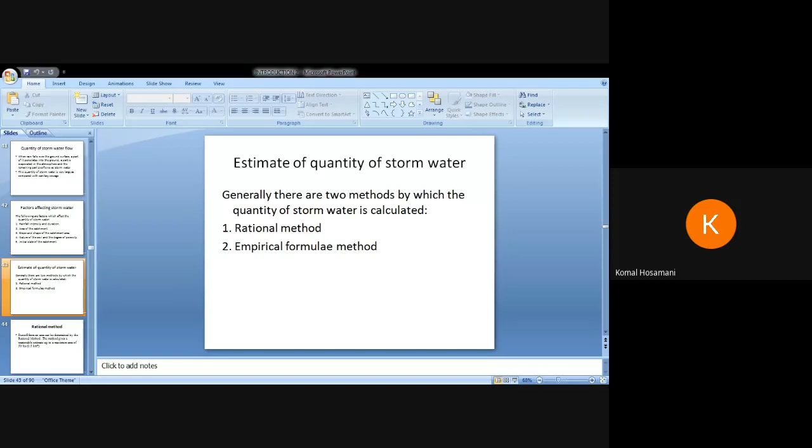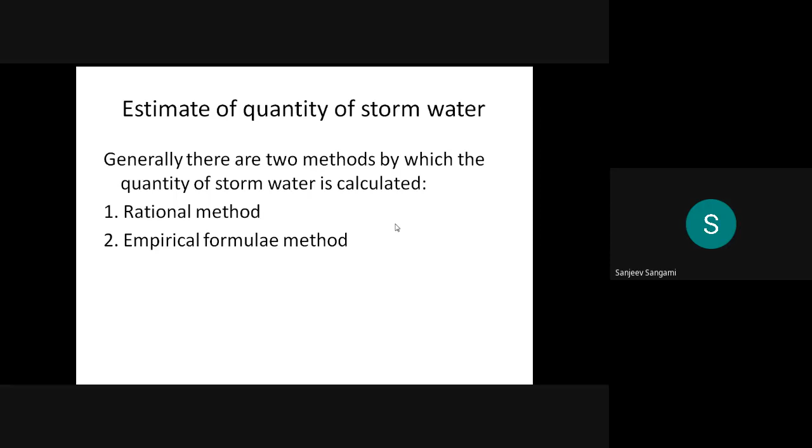Yesterday's class we were discussing the estimation of quantity of storm water. There are two methods: one is the rational method, and one more is the empirical method of determination of storm water. Normally the rational method is used when the area is less than 50 hectares, maximum 50 hectares. If it is crossing 50 hectares, then we will use the empirical method.

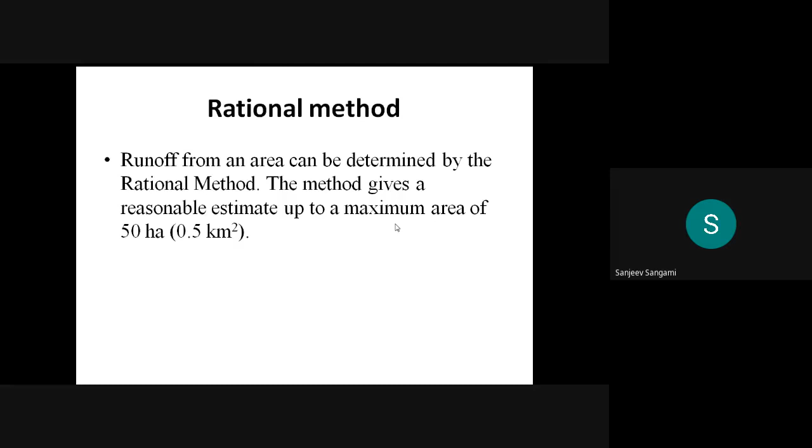These are some of the assumptions we have already discussed. Very importantly, precipitation should be uniform throughout the basin of study, and the frequency should also be same, and it is assumed that the rainfall intensity also should be same. Normally it is restricted to 10 minutes of rainfall concentration that we already discussed.

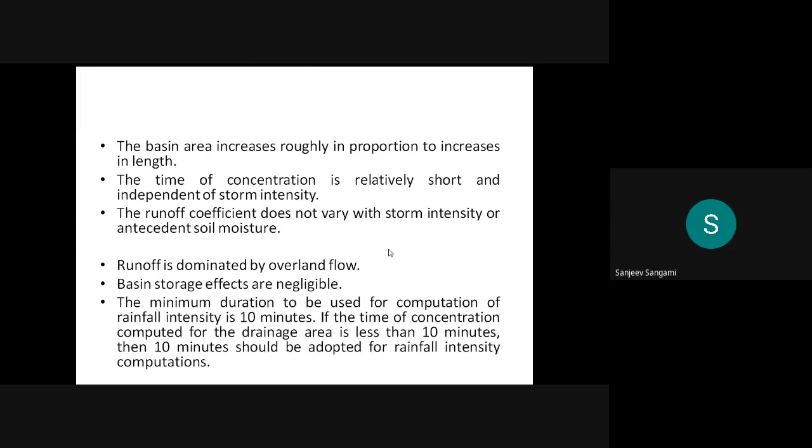It is given by the formula Q equals CIA divided by 360, where C is coefficient of runoff, I is intensity of rainfall, A is area in hectares. Whatever rational methods and empirical formulas we discuss today have to be substituted in their proper units only. For example, Q should be substituted in meter cube per second, I in mm per hour, C has no units, and A should be substituted in hectares only.

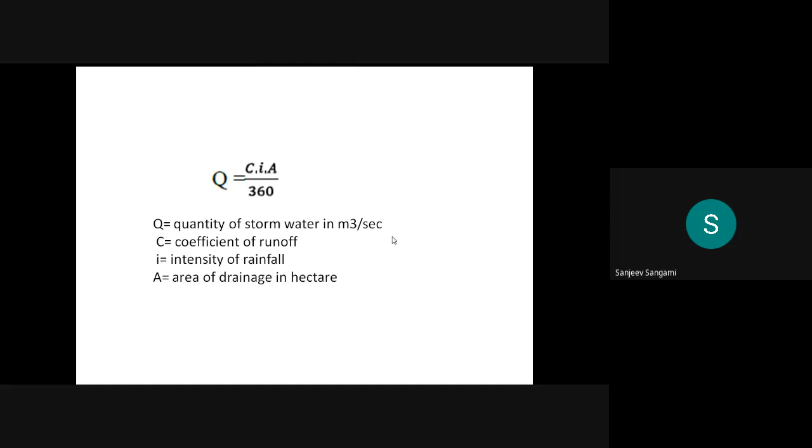If you have different types of basins in one area, then we can calculate the runoff coefficient using this formula: C equals A1C1 plus A2C2 plus A3C3 up to ANCN, divided by A1 plus A2 plus A3 up to AN, where A1, A2, A3 are the areas of different types, and C1, C2, C3 are the different runoff coefficients.

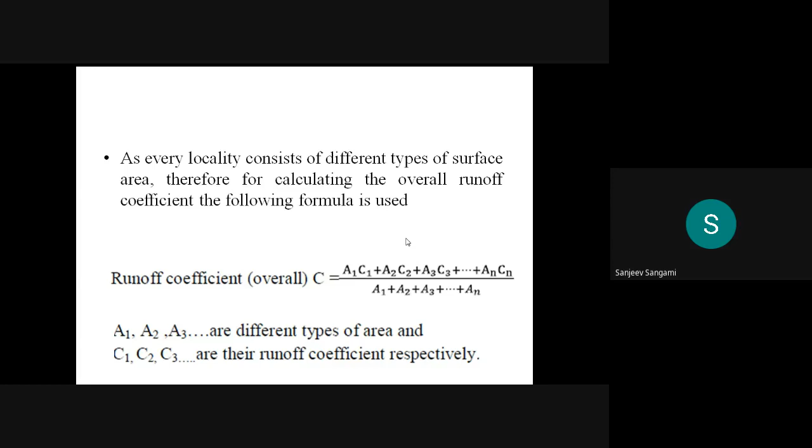These are some of the runoff coefficients for different types of areas. We have drawn three major conclusions: one with respect to the slope, one with respect to the type of area, and one with respect to whether it is residential or related to the city.

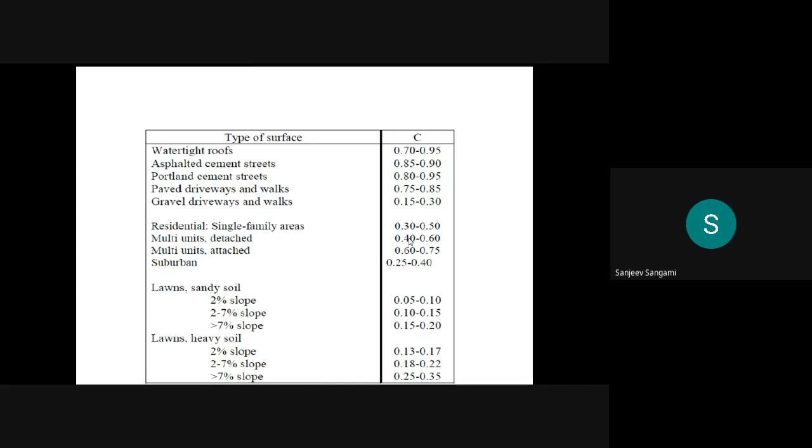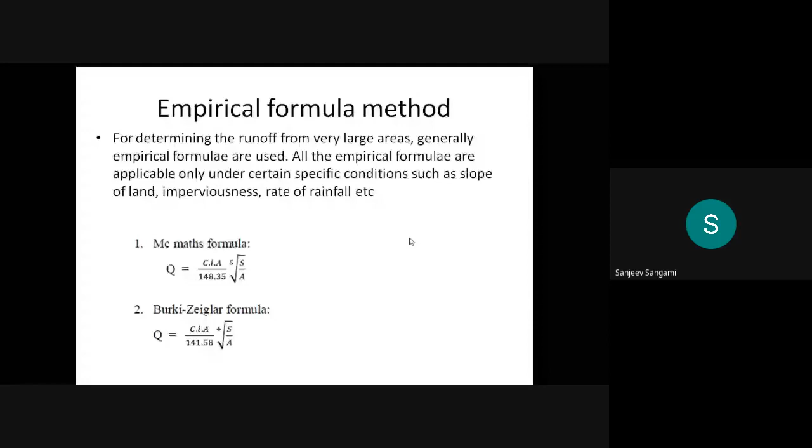We have discussed the empirical formulas: McMath's formula, Burki-Zeiglar formula, Fuller's formula, Talbot's formula, and Fanning's formula. Based on the situations, based on the conditions, we will go ahead with each of these formulas.

Remember that whenever you substitute values in the formulas, it should be in that unit only. In the previous formulas, I should be substituted in centimeter per hour, C is coefficient of runoff, Q should always be substituted in meter cube per second, and A should be substituted in hectares. Wherever M is there in the formula, remember it should be substituted in square kilometers.

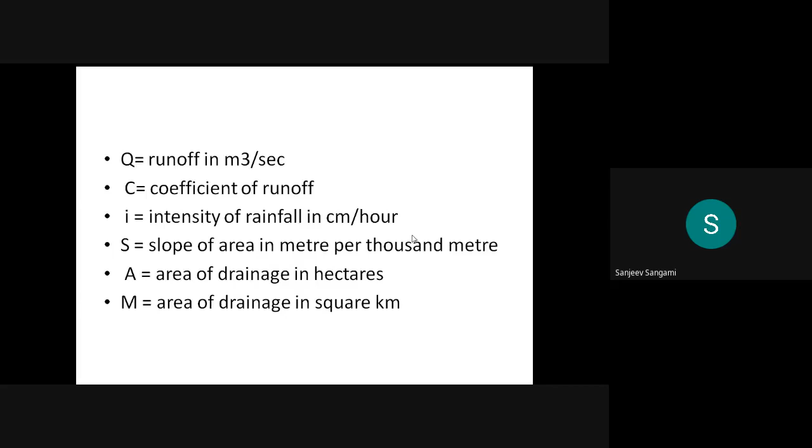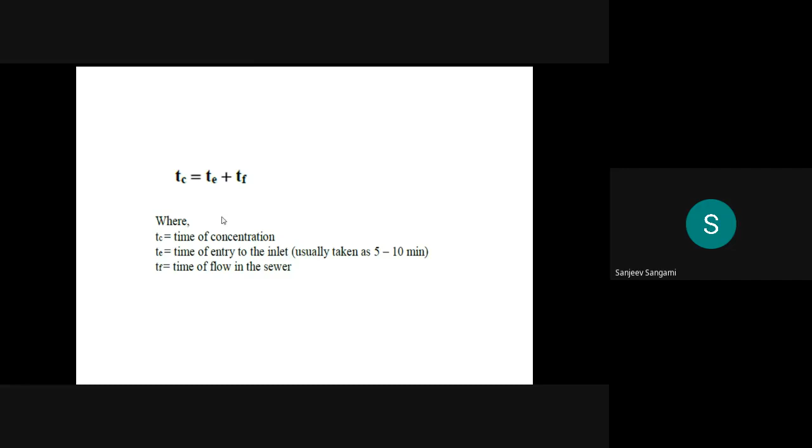Time of concentration we already discussed: Tc equals Te plus Tf, where Te is time of entry and Tf is time of flow. What is time of entry? When the rainfall will start entering the mouth of the sewer, normally we can call it time of entry.

Time of flow means the time from the point of entry of the sewer to the point of measurement of discharge in a pipeline. For example, if I am measuring the discharge at 100 meters, the time taken to reach that distance is called the time of flow.

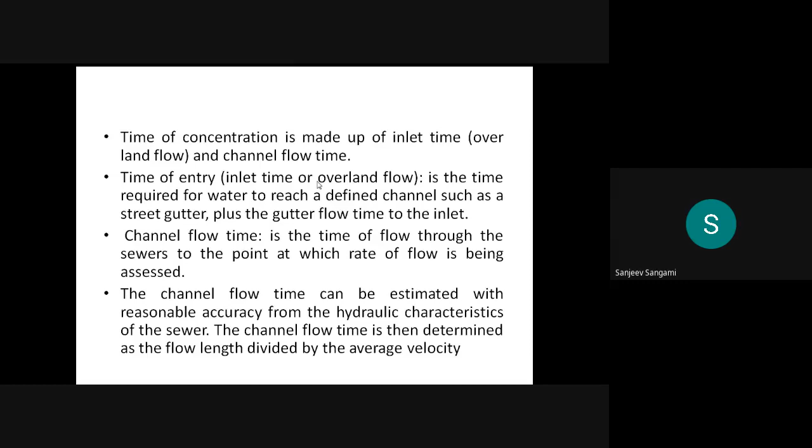Then H is the relief along the main channel. We can assume this relief as the loss of head. Relief is assumed as the loss of head in the channel.

Another scientist, Kerby, gave a method for small watersheds, up to 50 hectares. If the watershed is up to 50 hectares, you can use this Kerby method of calculating time of concentration, where Tc equals 0.67 NL divided by root of S, whole to the power 0.467, where Tc, the time of concentration, is given in minutes.

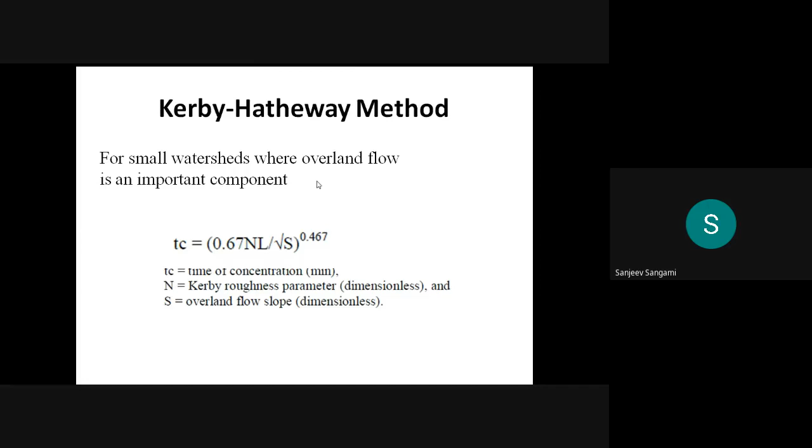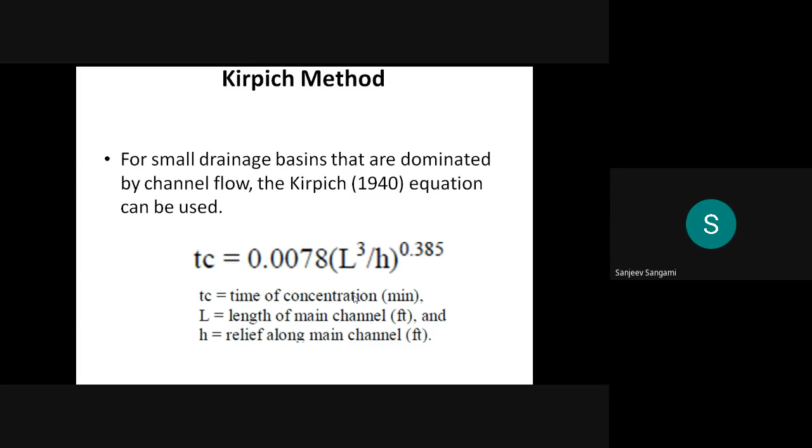So normally these three formulas will be used. The first one what we discussed, this formula is used for up to 200 hectares. If it is lesser than that, we'll use the Kirpich method and the Kerby's method. So then we will try to solve one problem.

This is one problem related to whatever we have discussed, the empirical formulas and the rational methods, to see how much. We already said that the rational method is restricted for up to 50 hectares, but if it is more than that, we have to use the empirical formulas, that is, Q is equal to CIA divided by 360.

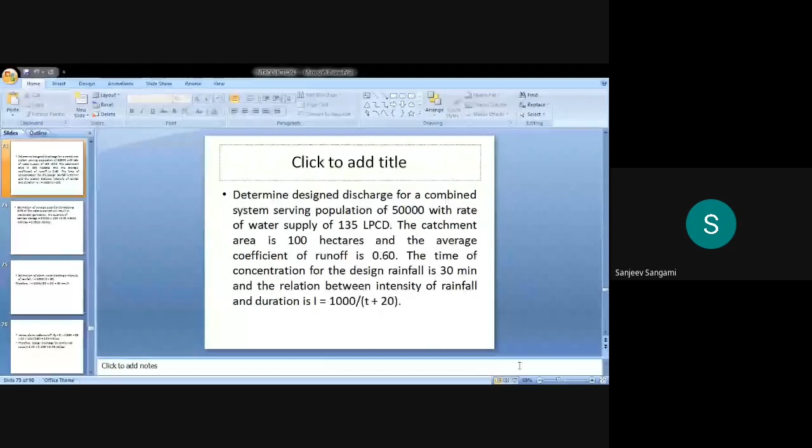Come back to this problem. Determine design discharge for a combined system serving a population of 50,000 with the rate of water supply 135 LPCD.

So the catchment area, that is 100 hectares, they have given. So then we have to use the empirical formula only, because it is more than 50 hectares. Then the runoff C, that is they have given C as 0.6, that is overall, whatever the 100 hectares they have given, that is 0.6 only.

Then whatever the rainfall that is there, they have given, that is I, that is time of concentration, that is nothing but Tc. And the relation between the intensity of rainfall and the time of concentration, they have given the formula called this formula.

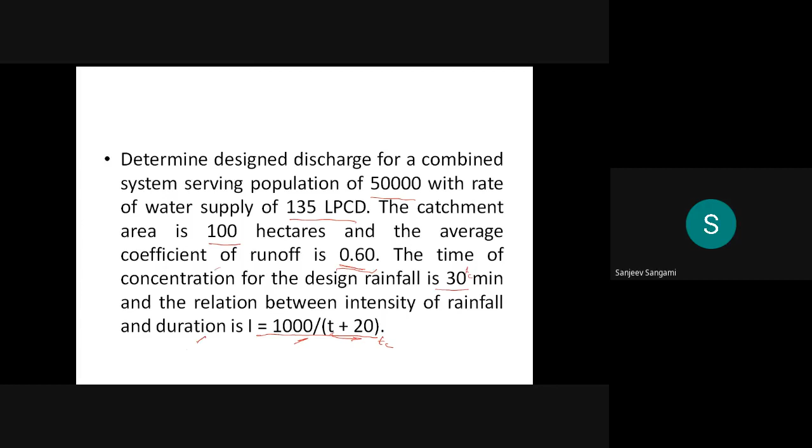So now these are the given data. Then what he has asked to calculate, that is the Q has to be calculated. So then you have to use the formula CIA divided by 360, where C is the runoff coefficient, I is the intensity of rainfall, and A is the area in hectares. And always Q will come in meter cube per second only.

So then let's start with the first one, that is sewage quantity, how much it is coming. First you have to calculate it. But he has asked for the total. Whenever he asks about the combined system, remember that combined system is equal to the sewage plus the stormwater.

So in this, first we will calculate this. Here we have calculated that. And first one, that is sewage, is equal to 50,000, that is population, into 135, that is liters per capita per day, LPCD, into, we are multiplying with 0.8. Why we are considering 0.8 means we have to assume 80% of whatever the water demand it will be, that will be considered as the sewage.

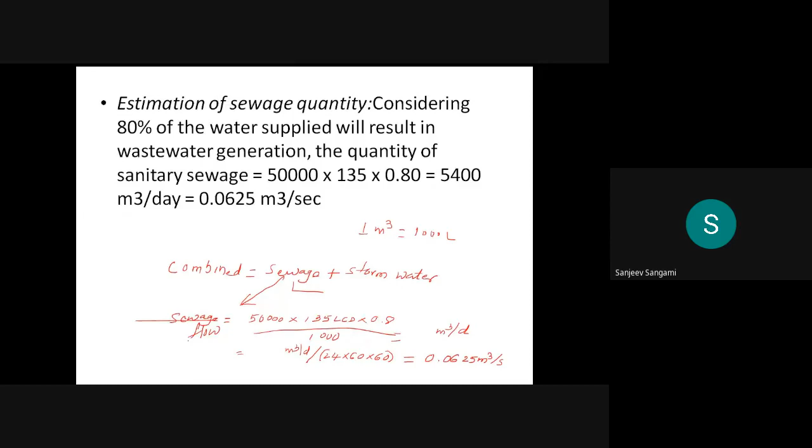For stormwater flow, when calculating Q, we require I, where C is already given, A is already given. So we have to calculate I first, that is intensity of rainfall. They have given this formula: 1000 divided by bracket T plus 20.

Remember, whatever T is there, it should be substituted in minutes. Do not substitute in seconds, because these are empirical formulas designed for specific units only. Many students make mistakes when substituting T - sometimes they substitute T in seconds, but this formula is designed for T value in minutes only.

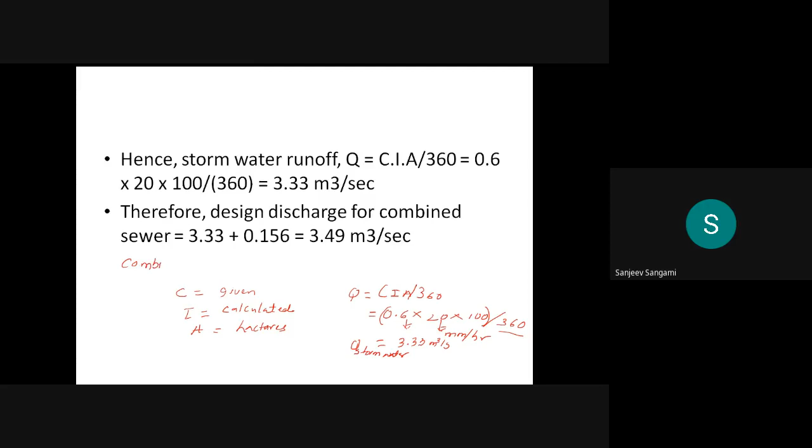But he said it is combined. So combined is equal to the sewage plus stormwater. Sewage is already calculated as 0.156, and remember that whenever you are adding or subtracting, make sure both should be in the same unit. That is 3.33 for stormwater. When you calculate it, you get 3.49 meter cube per second.

Always remember, this problem has been asked many times. Every time this kind of problem will be there. Last year it has been asked, and from 2016 continuously they are asking, either in the July session or the December session.

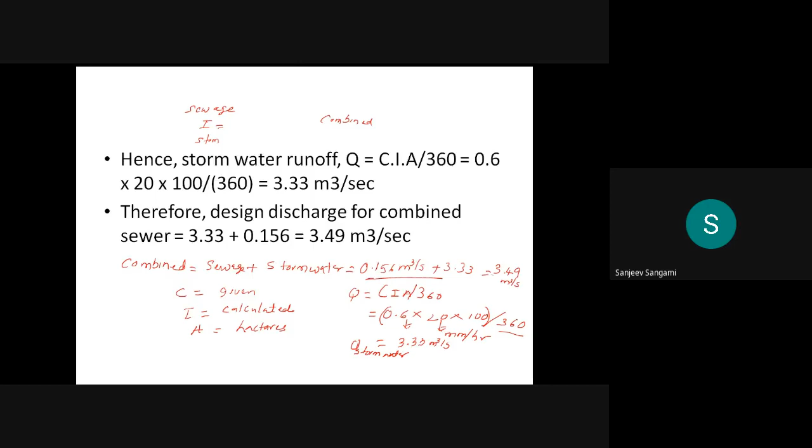Remember there are 3 steps. Finally we can conclude that first it is the combined flow - first you have to calculate the sewage flow, then you have to calculate I, then we have to calculate the stormwater, then once calculated, add all those things, then calculate combined flow. This is a simple problem, but last time it was asked for 8 marks. Very important thing is that you should be very careful about the units.

So this is one problem. Remember that in Q equals CIA, I should be substituted in mm per hour only.